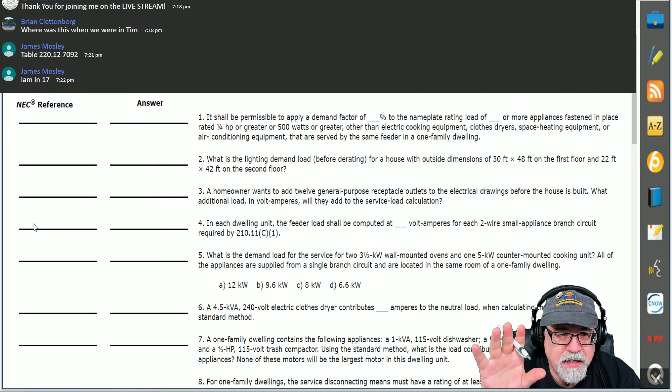I know that there's 26 of you out there, at least right now, who are studying or coming to visit with us to study. Give it a shot. Don't be shy. I know you're sitting in the background and it doesn't matter. Come on out. And again, this is the only way we do this. These guys will tell you I try to do this usually every week. Chime on in. It's okay to be wrong. It doesn't matter. We're learning.

Okay, so it's okay. But this is an interesting one that people get wrong a lot. Because if, and let's wait. Let's see if I get any answers first before we go into this one. And while you're thinking about this, I'll bring another scenario in. If you have your house, let me ask you the same question. Jay's not with us tonight, but Jay's the basement king. Jay does a lot of basements, and he's also a fast track student.

Okay. Katie gave it a shot. Thank you, Katie. Come on, people, chime in. It's okay. Because this is how you learn. And once you learn, you'll never miss it again. Promise you. Okay, so hang in there, Katie. Don't jump off. We're going to finish this lesson on this one. But anyway, while I'm giving time for people to post, there you go, butterfly farting. Do they really? I mean, I can't hear if a butterfly farts, but I guess it's truly possible. So think about this one.

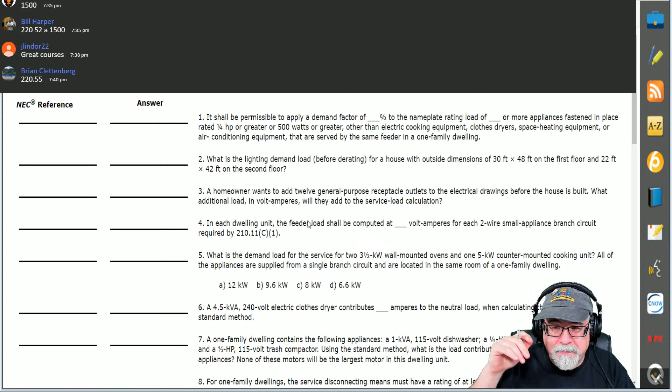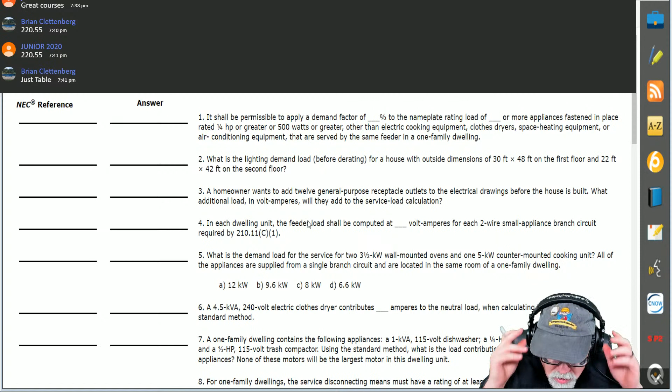But again, there's another way to do this. As you students are going through this, don't look up at the chat part. Just look at the screen and answer the question, and don't look at what other people chat until you have your answer, right? That's probably the best way to do it. Hey, Brian didn't give the answer away though. So nobody's given the answer away yet. Oh, good. So best way to do it is just don't look at the comments until you find the answer and then post your comment in there. Brian Jr., absolutely right. Obviously, y'all are on the right track.

So we got to look at it, see what we're doing. So let me write this down so that I don't lose it, because I ain't getting any brighter over the years.

I'm brighter than last night's debate. I can tell you that right now. No doubt about that.

But anyway, so we got 1 5 kW. Okay. So I've got 2 3.5 kW and I got 1 5 kW. Okay. I've got that answer. All right. Everybody a little time to look, and I'll go on. Got the question? Everybody write down the question. So let's go to the code.

That ain't the code, obviously. Hold on. Got the wrong one up. There we go. That's my timer, folks. Okay, so let's go to 20. Oh, before anybody asks, this is the online edition. NFPA is not doing a PDF version anymore. You have to pay for a subscription version to do anything. Okay.

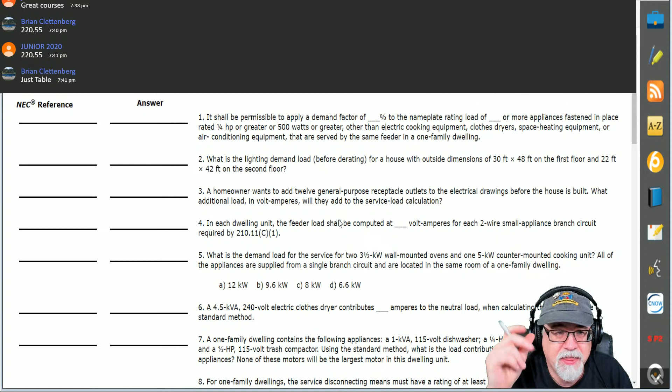And so in this case, it's 6.6 because you simply added 3.5, 3.5, and 5. And then you multiply that by the percentage. In this case, it was 3 of them, so it was 55%. And that's how we got 6.6 kW, and that is the answer. Okay? Everybody kind of square on that one? Very much might be something that you get on an exam. Anybody have any questions about that one before I move on to the next one?

Somebody let me know at least y'all are still there. Here, I'll do my own little thank you, and that'll tell me. There I go. We're still there. Okay, at least I think we're still there. Y'all are just an extremely shy bunch. So there you go. All right. Let me throw that one away, and we'll go to the next one.

I find that a lot of people get kind of stressed out about range calculations, and it really is easy if you slow down and you really pay attention to the notes, and just remember you use C any other time, and you'll use C with note 1 and 2, and you'll use C except when note 3 applies, and then you get to compare C versus whatever column, A or B, okay?

So just kind of keep that in mind.

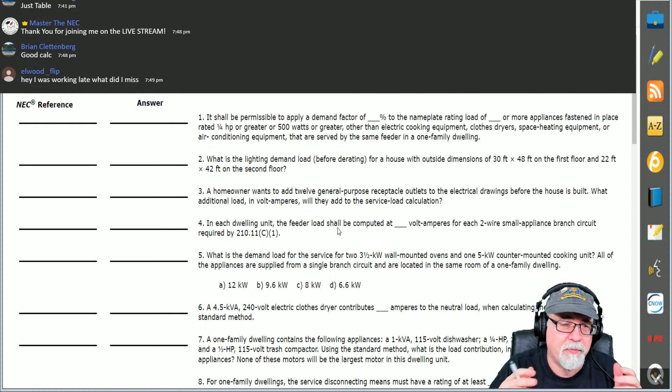All right, so let's move up a little bit. Hold on, let me go down a little bit. I went too far. Okay, let's look at number 6. Question number 6. There you go, Elwood, you can pick up right here with us. So number 6 is not as challenging. Most of the students get this one right, I believe, for the most part. But let's give it a shot.

And again, thinking out loud, chime in. Don't be shy. Feel free to answer. If you get it wrong, it's okay. Ain't nobody going to jump on you. This ain't like some of those other forums online where they're like, what, you didn't know that? No, we don't need to know that. That's why we're working on it, you moron. Don't let other people get under your skin, okay? We're all learning. Everybody had to learn, and we never stop learning. Never stop learning, okay? And I'm also not always politically correct. So again, if I offend anybody, I don't mean to. It's just me.

All right, so the next one, number 6. We've got a 4.5 kVA, 240 volt electric clothes dryer. Incidentally, remember that clothes dryers aren't required, but if they're in your calculation for an exam, you have to take them into consideration. You're not required to have a clothes dryer in your house, but most people put one in. So 4.5 kVA. K stands for 1,000, VA is volt amperes, so 4.5 kVA is the same as 4,500 VA.

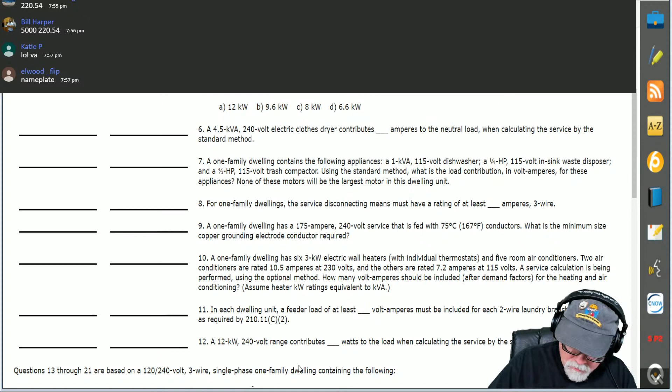So let's get our little patty wax down. Okay. So since it's asking for the amp contribution, the first thing I'm going to do is write 5,000 down, okay? And I'm going to divide that by, do a little Ohm's law here, a little EIR work, okay? I'm going to take that 5,000 and I'm going to divide that by 240. And that's going to give me 20.83. Okay? Let everybody see that on the screen? We only use the nameplate value on the optional method, not on the standard method. So 20.83.

Now, what does it tell me in 220.61(B)? Do we need to go to it? Let's go to it real quick. All right, so we're over here in the code. I can't remember which one my code is. This is the code. So here's neutral and feeder neutral load. So here's A and here's B, permitted reductions.

Note that it says a service or feeder supplying the following load shall be permitted to have an additional demand factor of 70% applied to the amount of 220.61(B)(1) or portion of the amount in 220.61(B)(2) determined by the following calculations. Well, we're not talking about 2. We're talking about this one, 1.

And it says a feeder or service supplying household electric ranges, wall-mounted cooking ovens, counter-mounted cooking units, even induction units. Again, don't let that fool you. Simply a counter-mounted cooking unit. And clothes dryers, where the maximum unbalanced load has been determined in accordance with Table 220.55 for ranges and Table 220.54 for dryers. Okay, but we only have one, right?

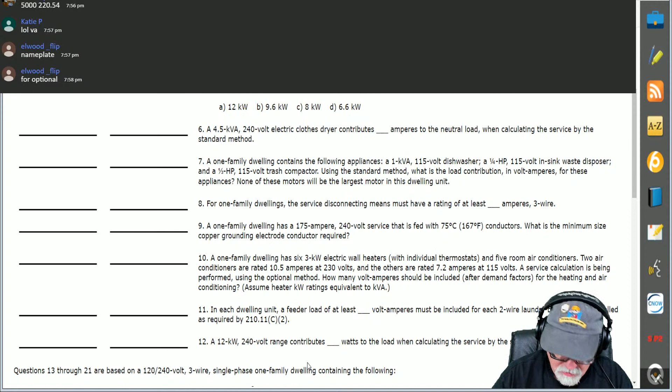Okay, so 20.83, and we're going to do that times 70%, and that is 14.58. So in this case, it wanted to know what the actual contribution is. If I were to round this to 15, for some students, I will accept the 15. I'm like, okay, you know what? In the real scheme of life, not a big deal. But in reality, the most correct answer is 14.58.

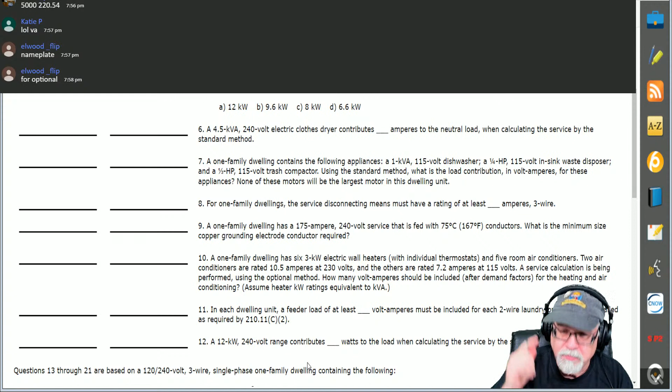Now, on an exam, if they give you 15, 14.58, 16, then the most accurate answer is 14.58 because that is the actual contribution on that neutral, okay? I took the 70% from the actual ampacity. So you take the 5,000, which is what you have to take from 220.54, and I divide it by 240 to get me amps, right? And that is 20.83. Once I have the amps, since the question is asking about amps, then I take the 70%, which is afforded me in 220.61(B), times 70%, and that's where I got the 14.58.

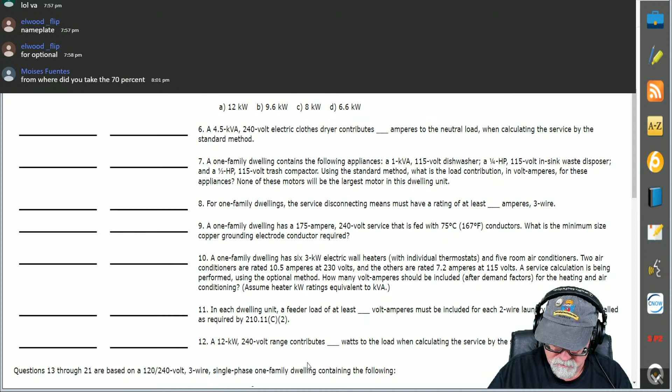Now, let's do it a different way. Let's say I were to take the 5,000, and you want to do it this way. Some people do it this way. Do the 5,000 times 70%. It's 3,500, which is probably what Katie was talking about. But once you get that 3,500, then you have to divide that by 240, and it still gives you the 14.58. So that's the beautiful thing, okay?

Yeah, well, you got to be a little more direct than that, Kevin. You can't put 13 through 15 amps. I mean, really? You daggone right I'm going to mark it wrong because there's an actual answer, 14.58.

So anyway, there's 2 ways to answer that one. That's the beautiful thing about the calculations, okay? You could have done it off the VA, or you could do it off the amps. I have a tendency to like to do things off the amps for questions like that. But again, both ways work. Apply the 70% either to the VA or to the amps. Isn't that a beautiful thing? It works either way. All right, next question.

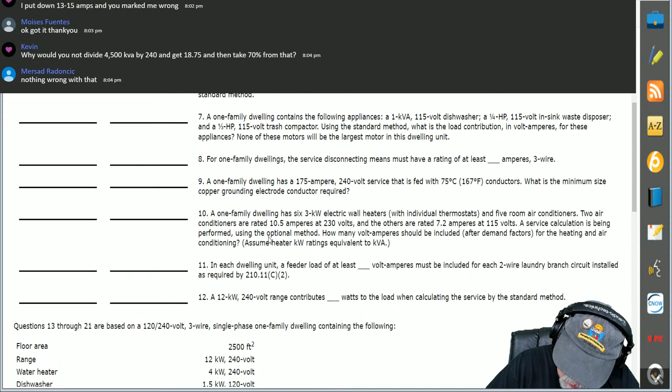A 1 kVA 115 volt dishwasher. So 1 kVA 115 volt dishwasher. I like writing stuff down. Just me. Okay. Number 2 is a 1/4 horsepower. So I'm going to write this down. 1/4 horsepower, 115 volts. Remember, always use what they give you in a question.

All right. Kevin, no, because 4500 VA, we're using a standard method. Standard method 220.54 says you got to use 5,000 or the nameplate, whichever is greater. We wouldn't use that. 4500 would be optional method, where that question wanted you to use the standard method. Got to be very careful. Make sure you understand the difference.

Okay. All right. So what do we have? 1/4 horsepower, 115 volt in-sink waste disposal. So let's just say it's a disposal. Next we have, what is that? 1/3 horsepower. God, it's hard to see. 1/3 horsepower, 115 volt. What do we got? Trash compactor. They even make those anymore?

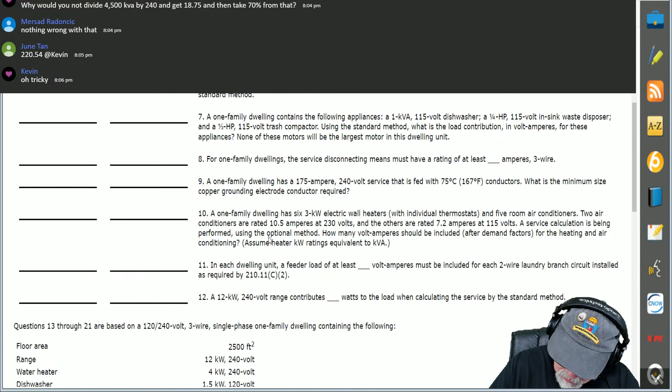My mom had one when I was younger, and it stopped working. So we just used to put trash in it anyway, but it never would compact it. I was the trash compactor in our family. Hey, Paul, shove that trash down. That's what I do. All right, so there you go.

Now, okay, so that's it. It says using the standard method, what is the load contribution in VA for these appliances? None of these motors will be the largest motor in the dwelling. So again, that's just slang for saying, no, you don't need to add the additional 25% for the largest motor.

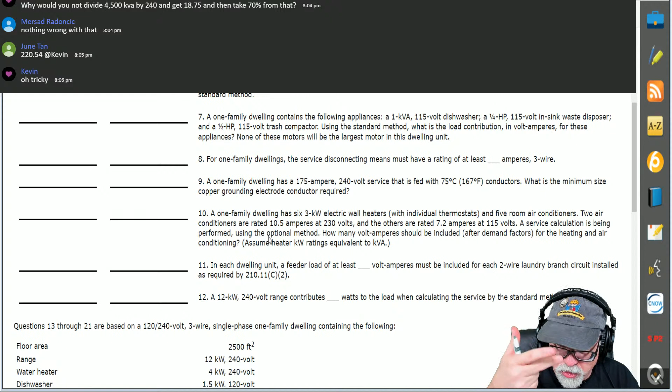So how many do we have, folks? We have a dishwasher, we have a disposal, and we have a trash compactor. I only count 3. Is that what y'all count? 3. It's important to remember that. It's only 3. Okay. This is great. This is a great one.

So the first thing you always want to do in an exam, when you get a question like this, this actually counts as a math question on many exams, okay? Because it's part of some math you have to do. Anytime you have some type of step in math, they have a 1-step, 2-step, 3-step, or 4-step. Like in Texas, if you have to calculate 2 things, it's a 2-step question or a 3-step question, okay? And they consider those master level. And I kind of think that they're pretty elementary, but again, they make you think. And anytime you're in a stressful environment, even a 2-step can be tricky sometimes, right?

So, all right, what do you think the first thing you have to do is? The very first thing is I need to get the values of each one of these motors, right? I need to solve these motors, okay? So first of all, I got to get the FLC. It's basically short for saying I'm going to have to go to 430, in this case 430.248, I believe, in order to get the values for single-phase motors, because all these obviously are single-phase. So let's make sure I wrote what I need down. So let's go to the NEC.

And it's the first thing you guys should do in this question on an exam, okay, is go to the NEC, and you got tabs in your code book for these tables. So you should go boom, boom, boom right there. I had somebody tell me the other day, you don't need tabs if you know the code. Come on, man. You're taking an exam. Anything that's going to shave some time off of looking up things is always a benefit.

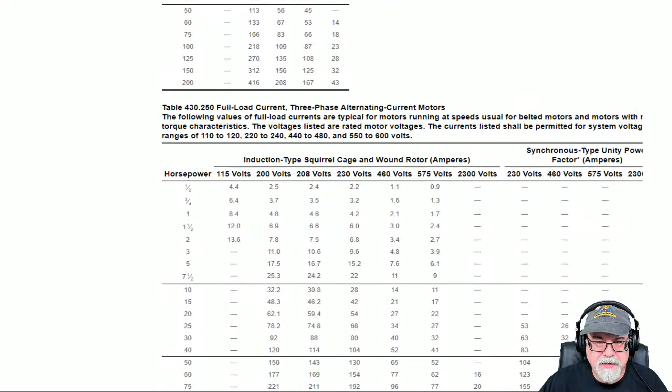Whoa, what happened to my... Hold on for a second. Whoa, what is going on with my screen, folks? All right, hold on. All right. So I don't know what was going on. It had a mind of its own.

All right. So we're looking at 430.248 single phase. We're right here. Okay. FLC. Remember, the value that's on the motor is the nameplate value. We don't want that when we're sizing conductors and overcurrent devices, only for overloads. For everything else, we use an FLC for the most part. So first one was 1/4 horsepower right here, and it was 115 volts. So it's 5.8 amps. Write that down.

The next one is a third right here. And that is 7.2. Write that down. 7.2. First thing you do. So now I have my amps. Okay. So once I have my amps, now you're thinking, well, wait a minute. And you'll come back to me now because we're pretty much done back there.

So now I already got one at 1000 VA for the dishwasher. I gotta convert the other ones now to what? VA. How do you do that? It's pretty simple. All you're going to do is take the amps and you'll multiply it by the voltage. So let's do the first one. So it was 115 times 5.8, and that is 667. So that is the disposal.

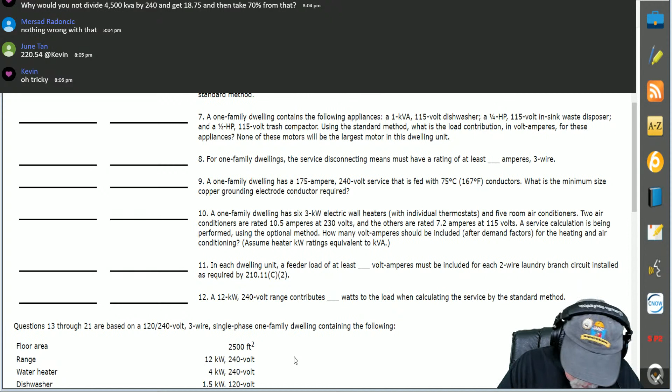And then the other one was 115 times 7.2, and that is 828. And that is the trash compactor. Of course, we had the 1000 for the dishwasher, right? So you might as well write that one down, 1000 for the dishwasher. Okay? Now, let's add those up. 1000 plus 828 plus 667 equals 2,495. So the question is simply asking for the standard method load calculation in VA for these appliances.

All right. Now, if you had 4 or more, then you could have applied a demand factor of 75%. But we only had 3. So don't get tricked up and apply a demand factor of 75% because you didn't have 4 or more. Now, on our nifty little fill-out sheet in the Fast Tracks program, it says right here, if 4 or more, multiply by 75%. If fewer than 4, the total VA on line 10, so basically you just add them up and that's it. So 2,495 VA is the answer to question number 7.

Of course, for the code references, we only make you put 1 in the Fast Tracks, so it would be the application of the appliances. But you could also have put in there 430.248. We'd allow that as well. But most of the time it's going to be 220.53 for that one, okay? You just don't add the 75% because you didn't have 4 or more.

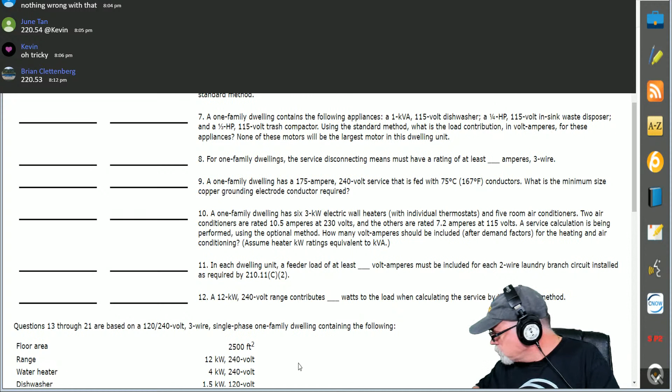All right. So somebody look that one up in the code for me. You should remember that there is a minimum ampere rating for a one family dwelling. This is one of those ones on an exam where you're like, I should get this right. First of all, dissecting the question, it's a service disconnecting means, so you know this is in services. So let's see who will answer this. And Fast Track students, feel free to chime in. This is a value that you really should remember, because it is the minimum size that you would have for a single family dwelling. Of course, you could have individual dwelling units that this wouldn't apply to, like in apartment buildings.

Okay. Tree, there you go. Very good. Kevin, very good. Absolutely. So 230.79(C) says that for a one family dwelling, it's going to be at least 100 amps. Interestingly enough, it could be less than that for an apartment, could be 60 amps. I believe that is 230.79(D) for that. All right. Very good. That one's a little too easy. So let's go to the next one. Now, here's something that you might see on an exam.

Okay, so buckle up, get your code books, get your pens, get everything ready. Number 9: a one family dwelling has a 175 ampere, 240 volt service that is fed with 75 degrees C conductors. And that is obviously important information there. What is the minimum size copper grounding electrode conductor required?

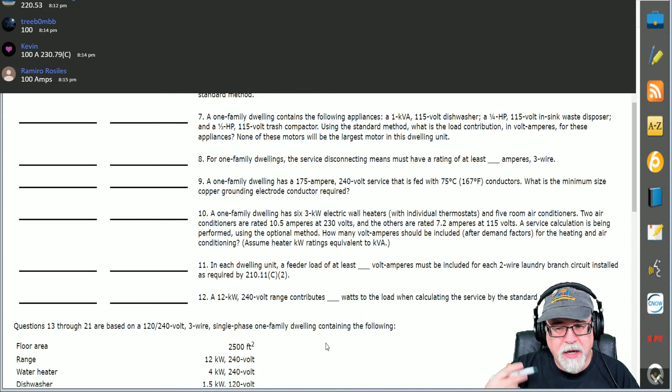I'm going to look at it and say, well, I know something very unique about this because it's a one family dwelling. The service size is between 100 and 400 amps. It's a 240 volt service. So we know it's what? 2 hots and a neutral. Okay, something's adding up in my mind. Hopefully it's adding up in your mind. That 75 degrees C conductors helps me once I get to that point. What can I do? What do I need to do? Okay, so think about it for a second. Give it a little thought. And let me see what you get.

And while y'all are doing that, the brains are working. I can feel them working. I'll go over to the code section. And again, I'm in a 2020 edition. Brian's giving everybody a hint. So don't y'all go cheating and looking at Brian, but Brian is giving y'all all a hint, kind of how to think that.

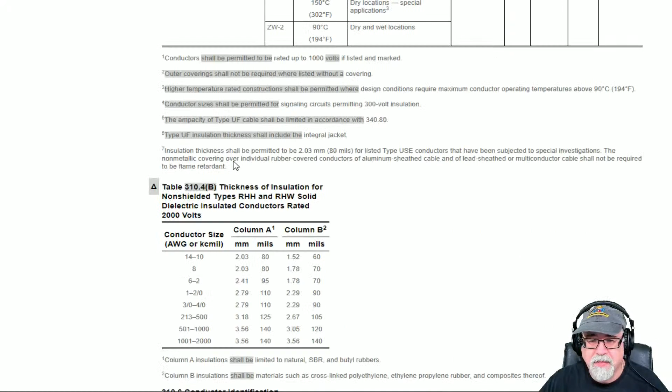I'll go on and go to the code, kind of help y'all out, because this is one that I would expect to see on some exams maybe, and you just need to know how to do this. Okay, so let's go to the NEC. All right, and I'll go back to the top for those that are watching. Oops, sorry about that, clicked the wrong button. Okay, so it is a little different in the 2020 than it is in the 2017, but same principles. Okay, this kind of chimes with what Brian was saying. Now, in this question, I didn't give you anything about adjustments or anything about corrections. Nothing.

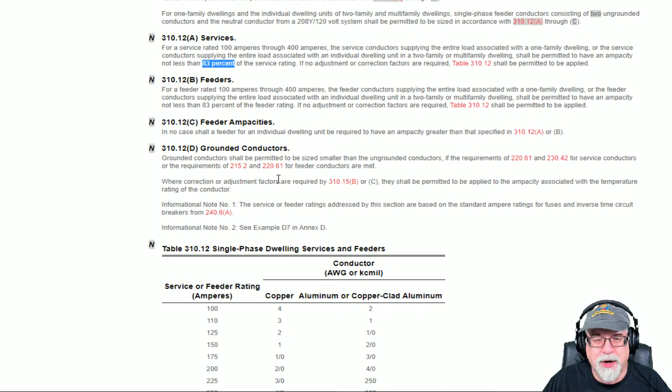Now, here's the difference. In the 2017 code, I'm going to make you calculate it. In the 2020 code, we're going back to the cheating world. We're going to give you the little table. My goal is to make sure you know how to calculate it. So, how do you calculate? You can go to the table, but in the real world, you take the rating of the breaker, in this case a 175, and I do 175 times 83%. So in our world, what I'm doing is making sure that I'm going to have conductors that are at least 83% of the rating.

So 175 times 83% is 145.25. Okay. Of course, you could cheat. You know what? I'm not going to call it cheating. It isn't cheating. It's right here. But I wanted to show you how to do it. 175 requires a 1/0. Okay? In this scenario, it has to be the size of the ungrounded conductors. That's the hot. And then you take that and then you go to 250.66, right? But I want to show you how to do this if you didn't use this table.

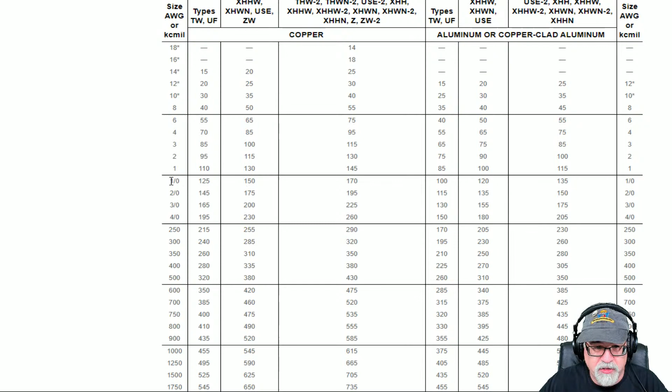So we got 145.25. Remember, it was 75 degrees C conductors. Then you would go to 310.16 right here. And 75 degree, remember it told you that? And you go down, and I need a conductor that's good for 145.25 because it's got to be at least 83%. And 1 gauge is not good enough. It's only good for 130. So I'd go to 1/0, which is good for 150, which is more than 145.25, so that is your answer. So once it's 1/0, then you go to table 250.66.

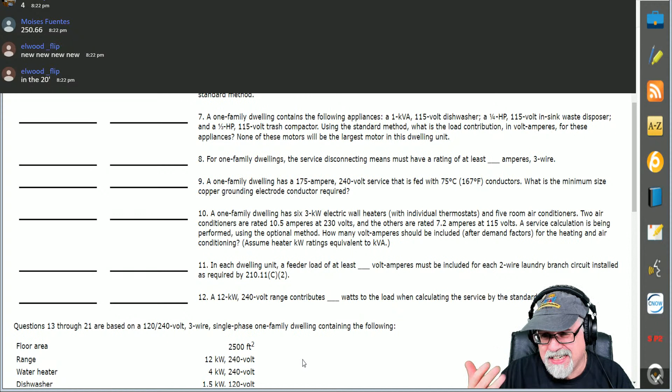Hopefully y'all are following along with me, and I'm moving quickly, but I think y'all get the gist of it. So here's 250.66. Once we know 1/0, then the size of the GEC is going to be a 6 gauge. And so the answer is going to be a 6 AWG. Okay? But a really good question for me to show you how to use 310.12 or 310.15(B)(7) if you're in the 2017 code. So 310.15(B)(7) in the 2017 code, it's not new, just been moved. But in the 2020, it's 310.12.

And the difference is the table came back in the 2020. Now, in the 2017, it's still in the book. It's just you got to go back to Informative Annex D. Got to go to D. Now, one little caveat, folks. Let me tell you this while I'm teaching people. That table is great if there's no adjustment and corrections involved. The table's wonderful. But the moment you throw an adjustment or correction into the mix, that table's no good anymore. So then just forget the table.

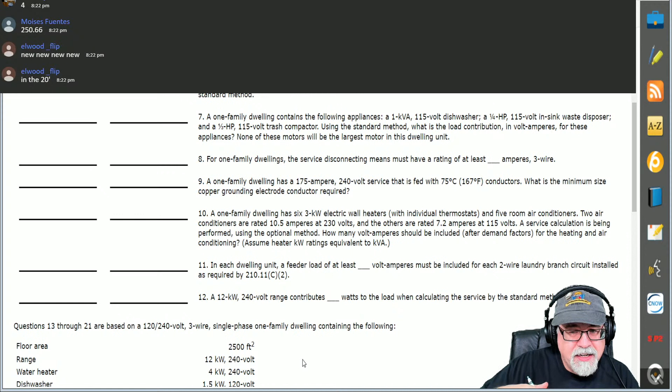So the conductor still at this point would be 83%, but then you would treat it like you did anything else. You would apply adjustment and corrections to it so that at the end of the calculation, I still have a conductor that's good for 83%. So that means you would go up in size in order to apply the adjustment and corrections so that you at least have a conductor that's 83. You can't get rid of the 83%. It's got to be at least 83%. But if you've got ambient temperature, or if you got a number of current-carrying conductors that exceed 3, then that table's no good to you. You still use the 83%, but you're going to use 310.16, the ampacities, and you're going to treat it just like we do in derating demystified.

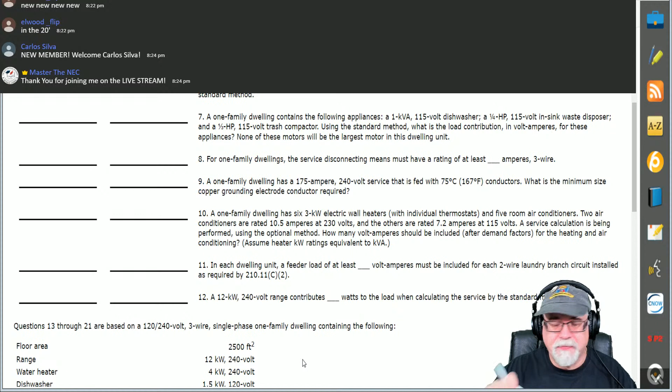All right, so that's how you do it. That's a powerful lesson. Hopefully you got it. If you didn't, go back and watch this later, and watch it again and again and you'll get it. All right, let's move on to another question.

Number 10. So number 10 is one family dwelling. Let me get my pen out here so we can work this one out. All right, so I have a one family dwelling, has 6 3 kW electric wall heaters, each with their individual thermostat. So it's typical strip heating like we normally would have. So I've got 6 of those, 6 3 kW wall heaters. They each got their own thermostat. Okay, cool. I've got 5 room air conditioners. I got 5 overall. So what is that made up of?

Well, it says I got 2 air conditioners rated 10.5 amps. So I've got 2 of them at 10.5 amps at 230. Easy enough. And the others, which tells me that I've got 3 at 7.2 amps. They're not giving you the numbers like that because they want to throw you here. And those are at 115 volts. It says a service calculation is being performed using the optional method. How many VA should be included after demand factors for the heaters and the air conditioning? Assume heaters kW rating is equivalent to kVA.

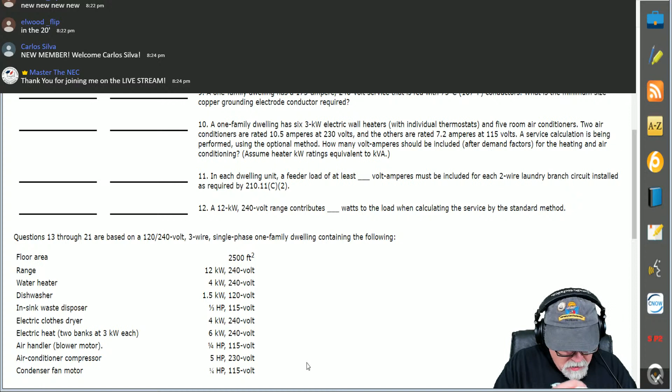All right, so we've got that. Hopefully you're working it out with me, folks. Work this one out with me; it's the only way you're going to learn. Remember, we're doing the optional method. They're all separately controlled. That's important. So let's see what it says in our calculations.

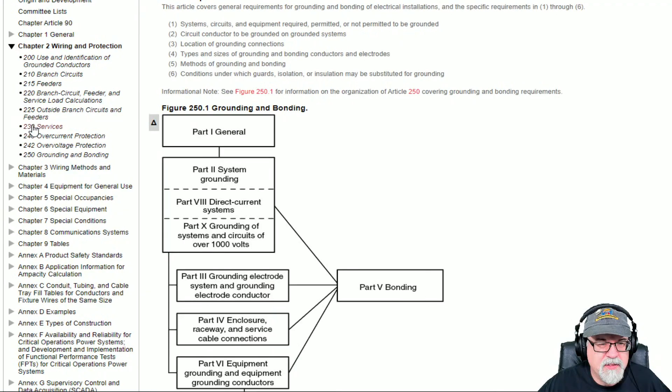Let's go to the code book. Hopefully y'all jotted those down. I'm at the code book, making sure I got it. Yep, there we go. Just follow along with me, folks. Let's go to 220. Oops, went too far. These things always throw me. Okay.

First thing, let's talk about that heat real quick, because I've got to compare. We know we've got to take the AC at 100%. We can leave that for a second. We'll do the heat because that's the harder one. 40% of the nameplate ratings of electric space heating if 4 or more separately controlled units. Well, there were 6 of these things, so I can apply 40%. That's a beautiful thing.

So 6 times 3,000 is 18,000. 18,000 times 40% is 7,200. And that's 7,200 VA, because remember, watts is synonymous with VA. So stick that 7,200 aside for a second. Now we've got to work on this AC. We did the heat; they were strips, those were easy. Let's do the other one.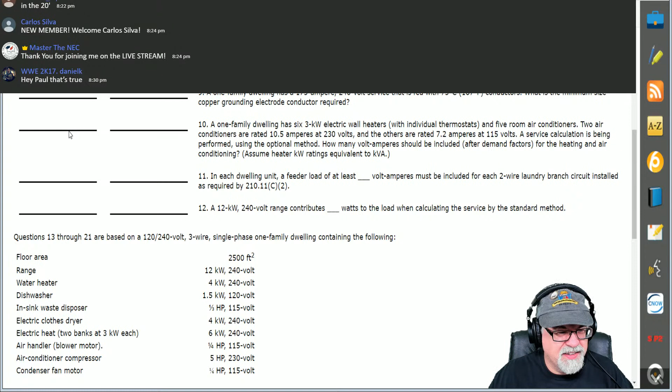Not sure what it says. Maybe I've lost all viewers. Let's see here. No, I think I'm still there. Not sure. There you go, Kevin.

1500 VA. Absolutely. Absolutely. There you go. There you go.

Question. You got a question, Brian? Shoot. I'm not sure if you had a question or not, Brian. You did a little question mark there. If you got a question, shoot it. Let's have it. Maybe not. Maybe no question.

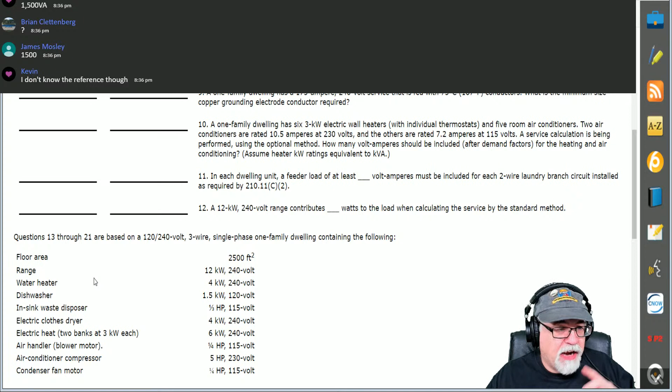Okay. All right. Let's look at number 12. Oh, the reference, near the same place that it was previously. Obviously, we're dealing with a 220 calculation to give us a VA value. So you're going to look at 220.52(B) is where you get the 1500 VA. Okay. And it's right next to where you get the one. Sorry, Brian. It's right there over where you got the answer for the 2 small appliances as well.

So just remember, 220 is going to give us the VA values. 210 is going to tell us the circuits and the laundry circuit and what you need. That's the 210 for the branch circuit. When it comes to the load or wants a VA value or something like that, always remember it's going to be in 220. All right. Let's do 12.

Good class tonight. 12 says, okay, a 12 kW, 240 volt range contributes blank watts to the load when calculating the service by the standard method. Okay, let's get some answers for this one.

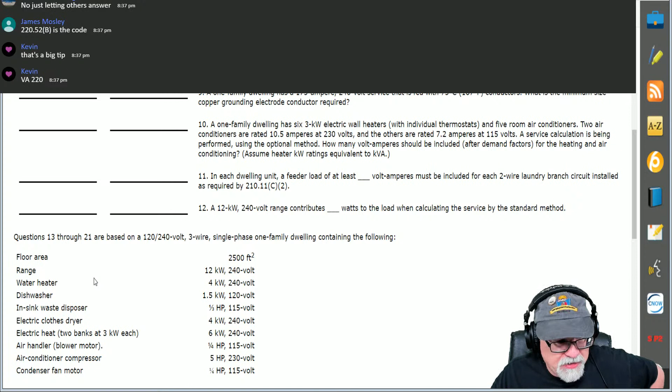Number 12. So I've got a 12 kW range in my house, but I'm doing a load calc, standard method. What is the contribution in wattage? What's the value that I would contribute to my load calculation under the standard method for that 12 kW range? What do you think? Somebody throw me out a number. Let me hear you. Kevin, I like your answer. Don't like your reference.

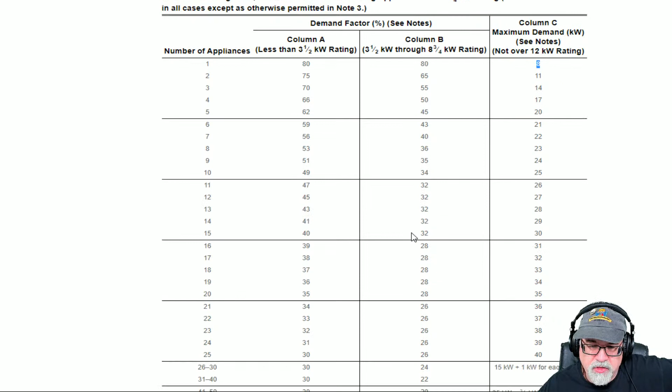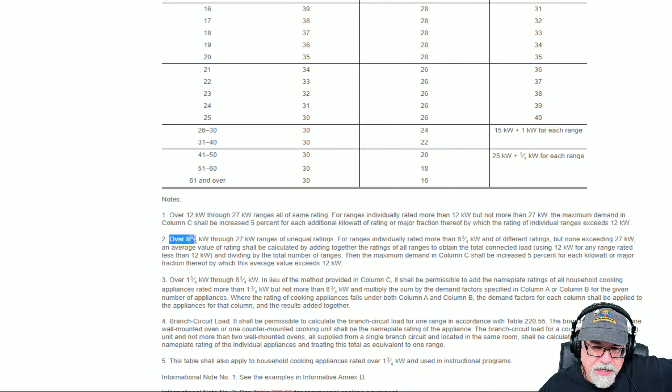Now, see, it says notes. Now, if it was over 12, then you got to use these notes. Or if there was multiple ones with unequal ratings that are over 8 3/4 through 27, then you use note 2. But in this case, it's just one range. One range. It's not over 12. So I can use 8. So I have some built-in demand allowances here.

It's a beautiful thing, as Martha Stewart will say. All right.

So just remember that. 8,000 watts, one range. You might say, but it's 12 kW, Paul, it's 12,000 watts. How can it be 8,000? Because it is, due to demands and allowances. Cycling. It's all good. Now, if you're using the optional method, you need to use the nameplate. That's where people get confused.

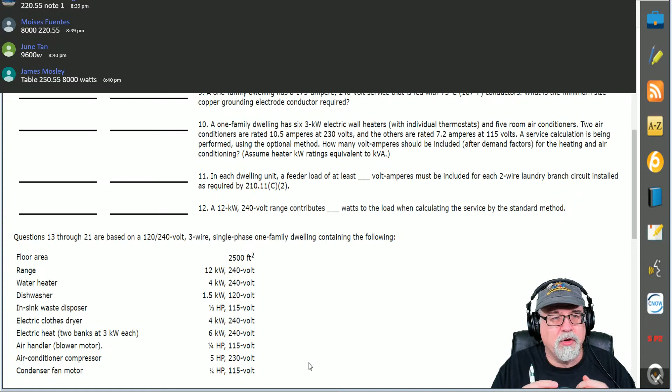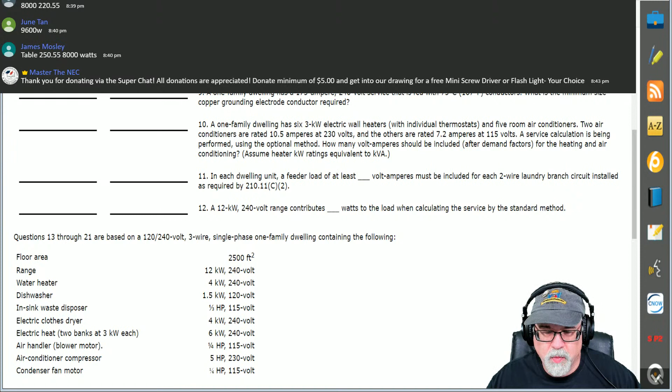All right. We've got a little time to do one of the more complicated ones here. Let's do the standard method. Let's try to solve these 4 questions right here. All right, so here's our givens, folks. And we're reminded that kW is equivalent to kVA. So you don't have to reinvent the wheel. Notice that we're going to answer questions 13, 14, 15, and 16 before we end tonight's segment.

So the first thing I would do, folks, is your scratch paper. You're not usually going to have it like this on an exam that makes you do all these things and gives you a whole building, but they might. So just be ready to do it. Now, we've already looked up most of these values. We'll look it up again, but you still should have the value.

The very first thing that I like to do if I got this question is convert all of my horsepowers into VA right out the gate, because I need to work in VA. Remember, kW is equivalent to kVA, but I need to break it down into the lowest form. So the first thing that I'm going to do, and I need to scroll down a little bit, is take all of these loads that are motors and get a VA. And you remember how we did that earlier?

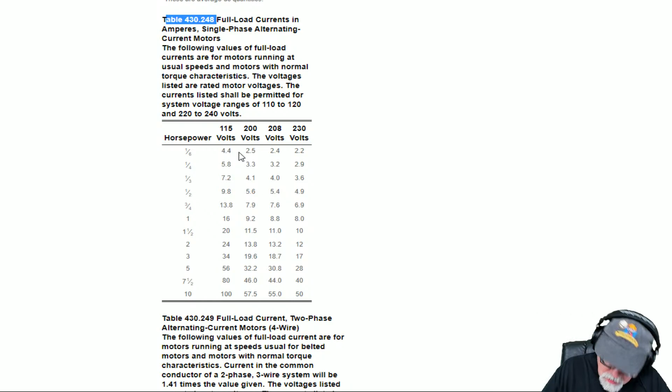So again, this is what I like to do first. If you don't, that's up to you. But first things first, I need to get my values. So here's my table. You more than likely have a tab for that. So 1/3 horsepower, 7.2 amps. Got that earlier. 1/4 horsepower, 5.8. And 1/6 horsepower is 4.4. We didn't have that one earlier. So 4.4 amps. All right, so we're done with that. Let's get back to our job here.

All right, now, remember how we convert these to VA? So the first one would be the 1/3 horsepower. We're going to do 7.2 times 115. Yes, you're going to use the value that's in your question. So the 1/3 horsepower equals 828 VA. Then the next one was the 1/4 horsepower at 5.8 amps. So 5.8 times 115, and that is 667 VA. And then we'll do the 1/6 horsepower. That one is 4.4 times 115, and that is 506.

All right, so by doing that, it gets me the values in VA so anywhere I need to add them, I can do that. Now, it might not be what's in the question, but to get there, I need to get those VAs. So do that first and make sure you get all of that out of the way, okay? All right, so let's work the first thing here.

All right, so how many square feet do we have in this house? 2,500 square feet. That's it. Boy, if you get this question, you got to love it, because it's easy, right? 2,500. Oh, and that's where this form comes in beautiful, guys. If you got one of these, I'll fill it out and show you. I wish I could do it on the screen. Maybe I'll work on that in the future.

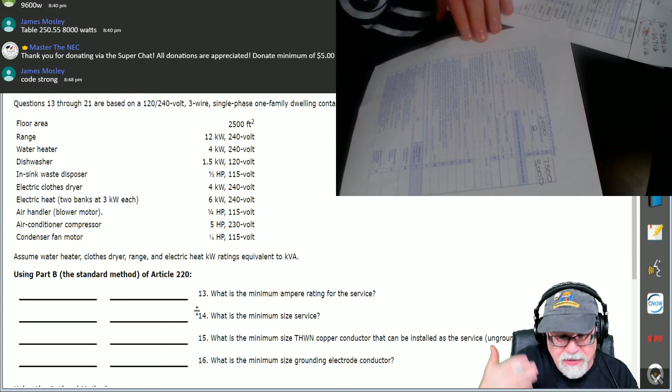All right. So as you can see, 3,000. Here, look at this. Oops. There we go. Okay. So the next one is, it says, well, we have a laundry circuit. Obviously, we see a clothes dryer, doesn't mean it's laundry, but we know that generally we're required a certain number of branch circuits in a house. So we got the laundry. So here, how many do we have? We got to have at least 1. So we'll put 1 right here. So that would be 1,500 times 1. So the answer is 1,500.

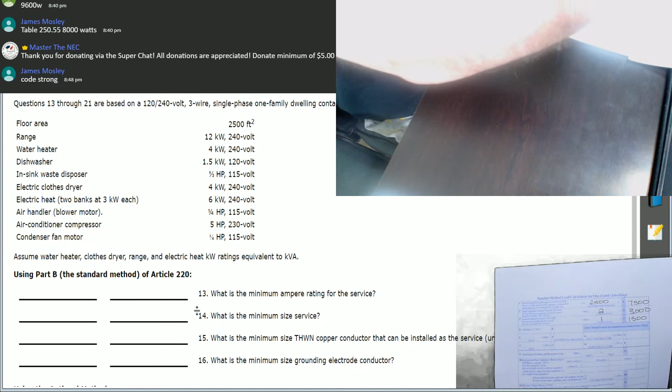All right. So we got the 1,500 right there. Y'all saw it on the screen. Hold on here. Okay. Oops. Knocking all of my papers around here, folks. All right. So what's next?

So the next thing that we're going to do logically is, okay, now since we have all of the general lighting and small appliance, I get to think about demand factors. It's the standard method, right? So remember in 220.42, it says that I can take the first 3,000 at 100%, and I take the next 117,000 at what? Anybody know? I know you know. Come on. Let's go to the code. Y'all are awful quiet out there.

So here's the code. I'm going to go through it so y'all can follow along. We're going to do this together. We're ending on a high note tonight, guys. For all of you that are preparing for an exam, we want to end on a high note. So here it is on the screen, 220.42. Here's what we're talking about.

First 3,000, 100%. 3,001 to 120,000, which typically you'll hear us say the next 117,000, because 117,000 plus 3,000 is 120,000. So it just kind of makes it easier. But we are telling you 3,001 to 120,000, it's 35%. And anything over 120,000 is 25%. Okay? So in our scenario, let's come back to me.

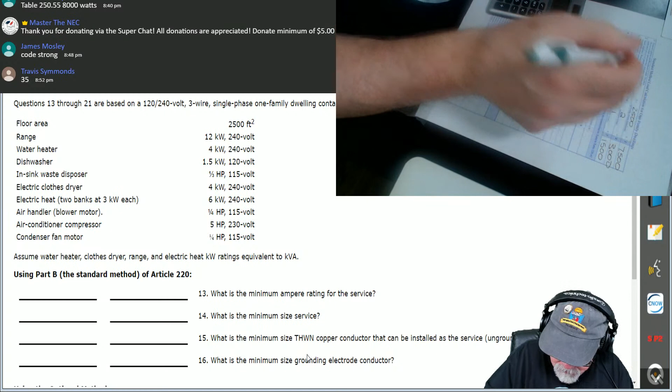So in our scenario, we get to take these, and we're going to add line 1, line 2, and line 3. So let's get our calculator out. So that's 7,500 plus 3,000 plus 1,500. 12,000. So what do we put right here on our little sheet? 12,000. Okay. Now, you carry it down right here, 12,000. Then you take the 3,000 away because we're going to use that later. So 12 minus 3 is 9. So the 9 goes here.

Okay, now you'll see how I'm using the sheet. The 9 goes here. So then we have no other additional there. So now the 9,000. So remember what we said? First 3,000 at 100%. The next value, we get to apply. So if you go back, let's just take you back so you can see in the code. If you look at how you run it, the next one, oops, sorry about that, the next one is 35%. Very rarely will you ever make it to this 25%.

Okay, so the amount that's over 3,000 all the way up to 120,000, that's the 9,000. So you take the 9,000 and put it right here, and then do that times the 35%. So 9,000 times 35% is 3,150. So 3,150 goes right here. Now you're going to come down here and you're going to take this 3,000 plus line 7. There was none from line 7.

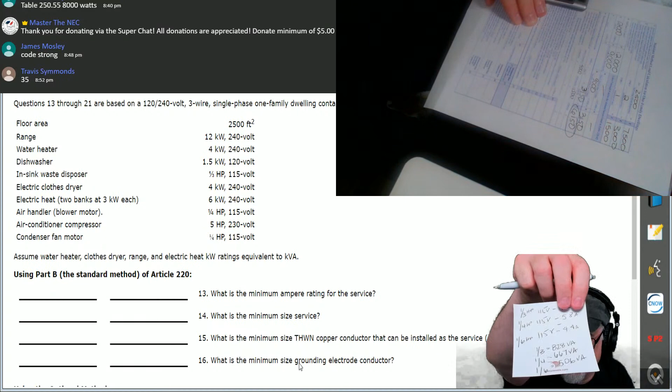The next, it says we have a dishwasher, and that is 1.5 kW. So that is synonymous with VA, right? So that's 1,500. Write that down. Remember, try to break it into VA. The next was a disposal, in-sink disposal, and that is 1/3 horsepower. So we did 1/3 already, and we looked that up, remember? And these are the values that we had right here. See that? I can put that under there for you, right there. See the third, 828. So we're going to write that down. So disposal, 828.

And there is no other appliance at that point. That's it. Okay. All right. So what do we want to do? Well, since we only have 3, notice right here on your fast track program, it talks about this 75%. We don't get to use that in 220.53 because we only had 3. So what are we going to do? Just like you thought. We're going to do the 4,000 plus the 1,500 plus the 828. And that is 6,328. And guess what? We got to take it all. So we're going to write that down right here, 6,328. Okay, so that's another number that we'll need to add at the end. So I like to circle it.

All right, the next thing we do is the clothes dryer. So what's the clothes dryer here? Clothes dryer is 4 kW. Well, what did we say earlier? In the standard method, in 220.54, it's got to be 5,000 or the nameplate, whichever is larger. We're not doing the optional, we're doing standard because the question asks for standard, right? So we're going to take 5,000. We're going to put 5,000 down. Write that down. Next one.

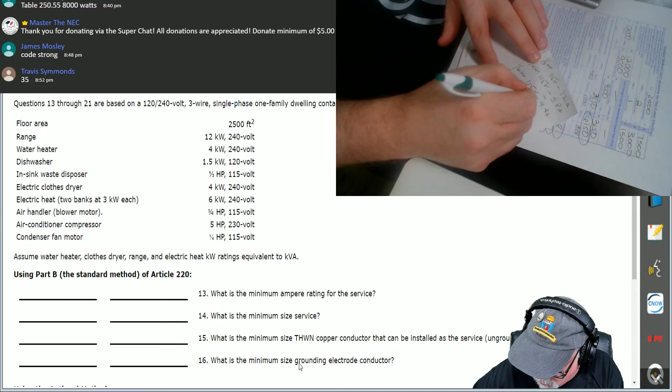And we have the air conditioner compressor, and that is at 5 horsepower. Oh, we didn't look that one up, did we? So we got to go back because that is going to be utilized, and that is single phase, but it is 5 horsepower. It's an air conditioning compressor, but it's treated as a motor. So real quickly, we got to go get that VA, and we'll write that down on our sheet. Let's get our little sheet, and we got a 5 horsepower at 230 volt, and let's just go back to the code.

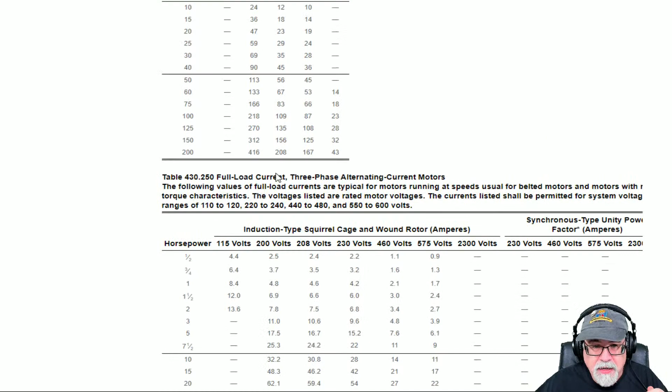Now, there's a reason why, folks, they're not going to give you a whole bunch of these on an exam, because they know these things take time to do, but they will give you any possible piece of this. That's why we use this form in the Fast Tracks program, because typically an exam's not going to ask you to do a whole calculation like this. But if we train you to do it, then you get familiar with it so that if you get asked any little piece of this, then you nail it, okay?

So remember, this was a 5 horsepower, so here it is, and it was 230, so it's 28 amps. So you're going to write that down. So that's 28 amps. So now let's go back to where we were.

Okay, we're all the way back. So that's 28 amps. So we got our little list of all of our horsepowers and everything like there, okay? All right, so let's do some math here. So let's look at the heat. So we know the heat is 6 kW. That's a given. Now, a lot of people might look at this and say, so 6 kW is 6,000 VA.

And they might look at this and go, well, I can already tell you that I got to get the VA for that 5 horsepower. So I'm going to go 28 times 230, and that is 6,440. So I already know that the AC is going to beat out the heat, right? I already know this, but let's finish it out. So we have 6,440 for the air compressor. The compressor unit.

So let's do 6,440. So what was that 1/6 horsepower again? You remember what the VA was? 506, right? So 506 VA for that. And then we want to add the air handler motor. That was a 1/4 horsepower. How much was that? That's 667. Added that in there. And anything else? Nope. Air handler, air conditioning compressor, and condenser fan motor.

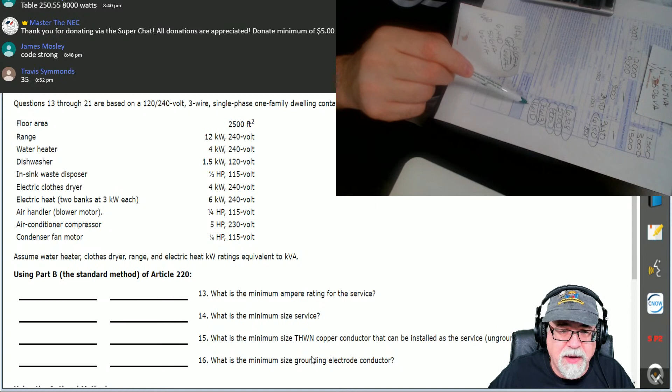Okay. So we're working each one of them. Now remember, we're taking 25% of the largest motor. And in this case, the air conditioning compressor is the largest motor. It's actually the largest motor in the equation, right? I don't think there's any of them any bigger than that. Now, that is the largest motor.

All right, so we got all these values. Now, what are we going to do? We got to add them all up. So let's go on and add them all up. So 6,328. Well, then we got all the ones that we circled, we got to add up. So 6,150 plus 5,000 plus 8,000 plus 7,613 plus 1,610.

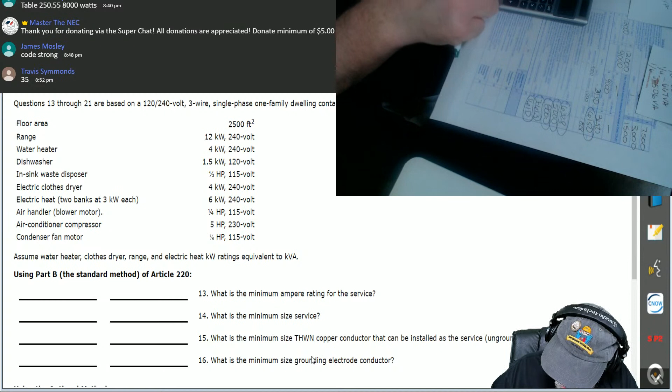Okay. We got all the values here. Did I miss something? I feel like I missed something. No, I don't think I missed anything. Let me do it again. 6,150. Hopefully y'all are doing it with me. Check my math here. Okay. 6,150 plus 6,328, so that's that one, plus 5,000 plus 8,000 plus 7,613 plus 1,610.

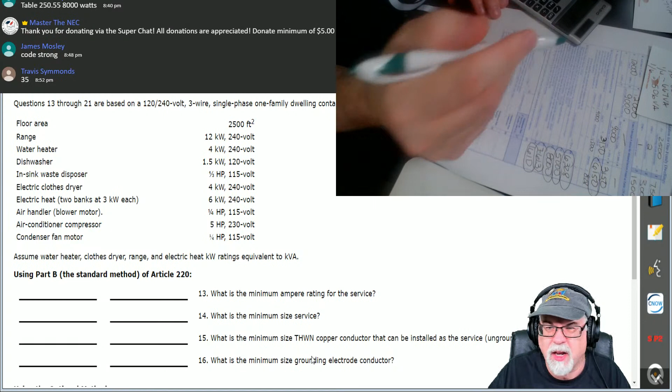Okay, so what we should have, if y'all are following along, those that have the fast track should follow along right here, which is number 16. We want to put the total of all these, which is 34,701. Okay. Now, the voltage, obviously, this is a 120/240, so we'll do 240 volt. So now it's simple, how y'all are used to doing everything. You do 34,701 divided by 240 equals 144.5.

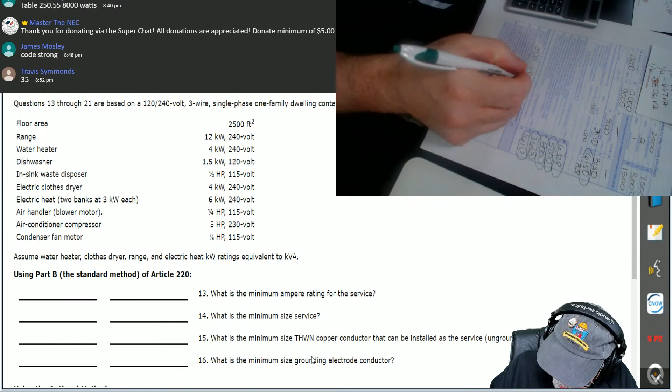And since it's 0.5, if you remember at the beginning of 220, it tells me that anything 0.5 or greater, I can round. So in this case, I want to put 145. So there you go. There's the 145. All right. So when you see the 145, the next thing you logically think, well, what size overcurrent device do I put on it for the 145? I'm not sizing conductor yet. I'm simply sizing the overcurrent device.

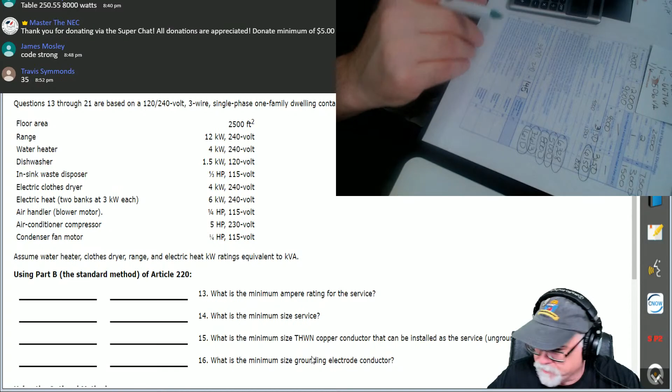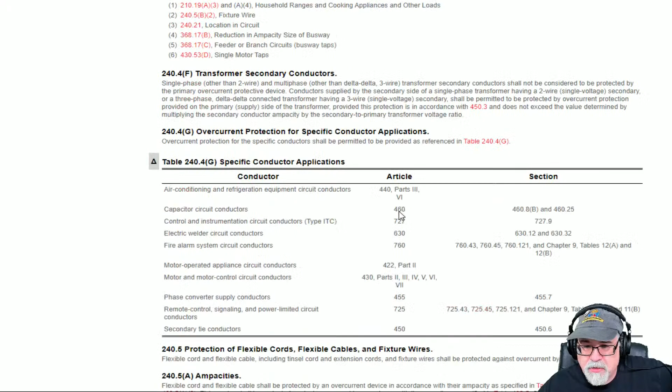Well, 145 doesn't correspond to a breaker in 240.6, and I don't think it does. So let's go look. I'm glad we did this one this way, slow. So let's go look at 240.6. If a breaker is 145, then we can use it, but I don't think there is. So here we're at 240.6, and here we go, folks. Let's see, we got a 125. Oh, got a 150. Okay, so the minimum size service or feeder based on 240.6(A) is going to be what? 150. Okay.

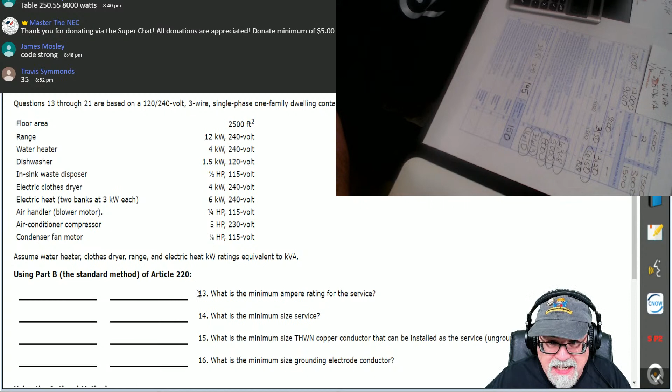All right, now, best possible answer, folks. Remember now, what size conductor? So we answered the question. So question 13, what's the answer? What's the minimum size rating of the service? The minimum size. What's the minimum size rating?

Oops, hold on. It's going to time me out again. I hate when it does that.

So question number 13 should be, what is the minimum ampere rating? Well, the minimum ampere rating is 145, not the device we selected. That's the size service. The minimum ampere rating is 145. So that's question 13, and we'll just do that over here. This is question number 13. All right, so number 14 says, what's the minimum size service? Well, remember the service is, I'll do that in a minute, June. The service is what the rating actually is of the breaker, okay?

Hold on, we're not there, Mosley. You're getting a step ahead of me. We're sizing the service now. Remember, the 83% rule is for the conductors. We have to get the service rating first before we can even use the 83, but I like what you're thinking. I like how the brain is working. All right, so the service is 150, okay? The minimum ampere rating is 145. Because it didn't correspond, that's how we ended up with the 150.

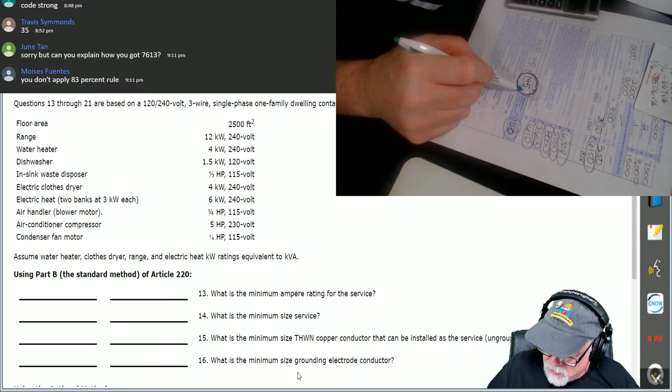So we're using the 150 to do exactly what Moises is saying. Can I size it to 150? Absolutely. But can I use the rule in 310.12, or if you're in the 2017 code, 310.15(B)(7)? The answer is sure. Why not? So in this case, since the service rating is 150, let's do it. So 150 times 83% is 124.5. No conditions of use have been spoken about yet. It's service, so usually there aren't anyway. So I need a conductor that's good for at least 124.5 amperes.

So let's go to the NEC. We're using the rule, assuming it applies, and it does in this case. I like how you're thinking, Moises. Let's go to 310.16 and find a conductor. And again, since we're not doing any adjustment or corrections, we're going to go straight to what we're dealing with. 124 amps is what we're looking for. Remember the rules in 110.14(C)(1). When it's over 100 amps, you're going to be under 75, so that should be a given by now. Even if it didn't give it to you in the question, you should understand 110.14(C) rules. So here, we're going to go down and find a conductor that's good for 124.5.

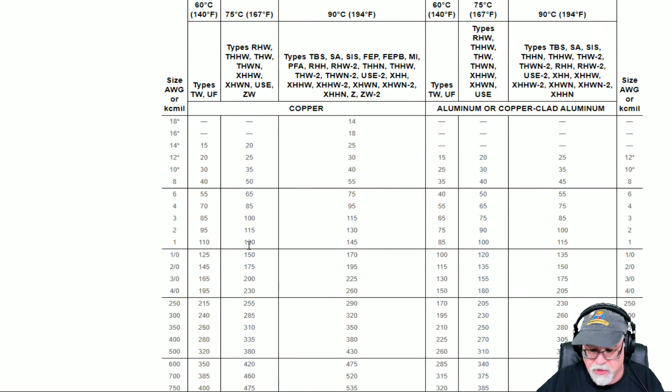And right here, it looks like it'd be a 1 gauge. So let's go back now to the browser. So the answer to, oh, and it did give us a size. There you go. It says consider the minimum size THWN. So that tells us it's under 75 as well.

So even if we didn't know the rules in 110.14(C), it doesn't really matter because THWN only has one H, so that's 75 degree rated column. Again, we only use 90 for adjustment and corrections anyway, so it really wouldn't matter. There's no adjustment and corrections that have been given in this equation. So we know that we'd be under the 75 degree column as well because it is THWN, and that's what's under the 75 degree column.

Now, if it had a -2, it could be 90 or 75, but it would be 90 wet or dry. But in our question, it just said THWN. So it's just 75 degree. So 2 ways to get there. You could have known 110.14(C), or you know that THWN is rated 75 degree. Easy peasy. So then you go down and say it's number 1.

So number 15, and I know I'm in the way, but you get the point. It is going to be 1 gauge. So that answers this question right here. So that's 1 AWG.

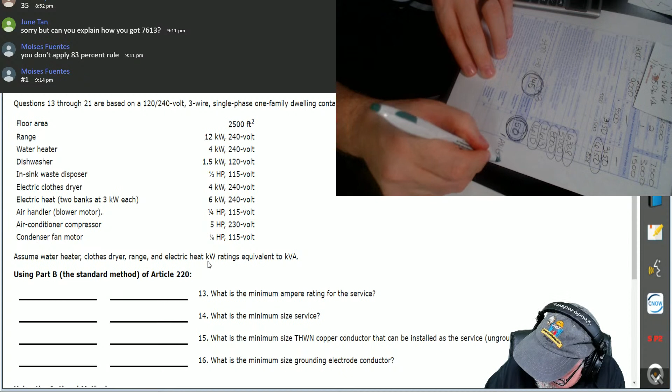All right. And then last question here, 16, it says, what's the minimum size grounding electrode conductor? Well, guess what? It didn't say it was ground rods. Here's another thing that people screw up on the exam. It didn't say ground rods. It didn't say plate. It didn't say pipe. It didn't say Ufer ground. It didn't say anything like that.

In 250.66(A), (B), and (C), if they tell you it's a ground rod, if they tell you it's a concrete encased electrode, things like that, then you can use 250.66(A), (B), and (C). If they don't tell you what type of electrode's being used, then you want to go to Table 250.66, based on the size of the ungrounded conductor. In our case, it's a 1, so we're going to go to the NEC.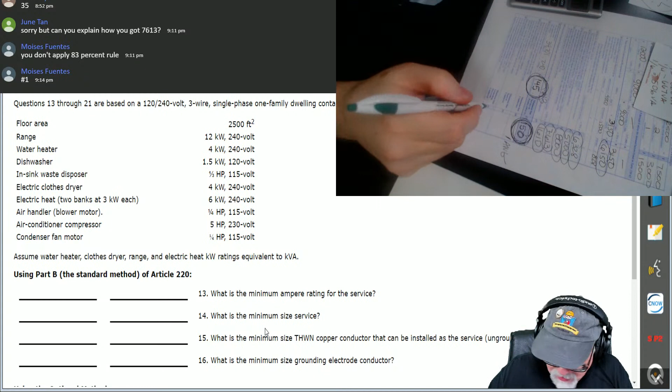So what's the minimum size grounding electrode conductor? And you're thinking to yourself, why isn't it aluminum? Remember, on an exam, always assume copper unless they state otherwise. Okay? So in this case, the answer here is 6 Cu. And that's how you solve 13, 14, 15, and 16.

And now the other ones, we don't have time tonight because again, my wife is going to kill me, are exactly the same way. You just use the optional method. It's no different. In the optional method, you simply take in all the nameplates. The beginning starts out the same, and maybe I'll save that for another episode, and we'll do that. But again, I wanted to give you the basics.

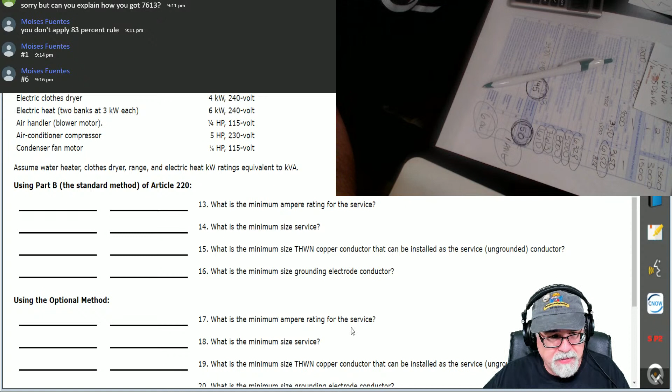So let me figure out how to turn this camera off of here. There we go. Let me get back to the main menu.

Great episode tonight, guys. We spent, what did we start at? 7? A little over 2 hours. We covered a lot. Believe it or not, Unit 8 is one of the tougher units. 11 is tough as well. 13 is tough as nails. But inside the Fast Tracks program, you learn how to do all these.

But I think what's important is that you get to use this form, it's awesome. I mean, look at it. I worked this whole one out using this. Now, some people say, yeah, but I don't get to use this on an exam. Absolutely not. Okay? But what it does is train you.

Now, June, let me go back to your question, because you asked where I got it, and I want to make sure I cover it. I want people to not think I forget them. God, I look like a bum. Anyway, I want to make sure that everybody knows where I got the values, June.

Where I got that 7,613 you were asking. Okay. So let me go back real quick to that, because I just remembered that I did not answer that for you. And I want to make sure you're clear. I want you to be successful. And to be successful, I have to be very accurate. I take a lot of pride in making sure I make things clear.

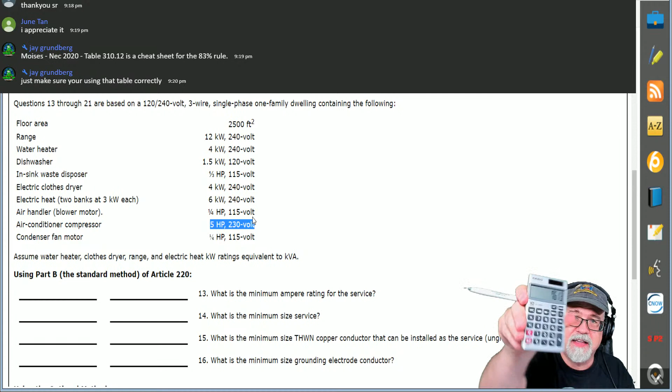So remember, the blower motor was 667, so I'm adding that back to it. And then also remember that condensing fan, that was 506 VA. Okay, so I'm adding that to it. And that's how we got the 7,613. That is larger than the 6,667 for the heat. So you take the larger. In this case, the AC wins. And that's what you put down here.

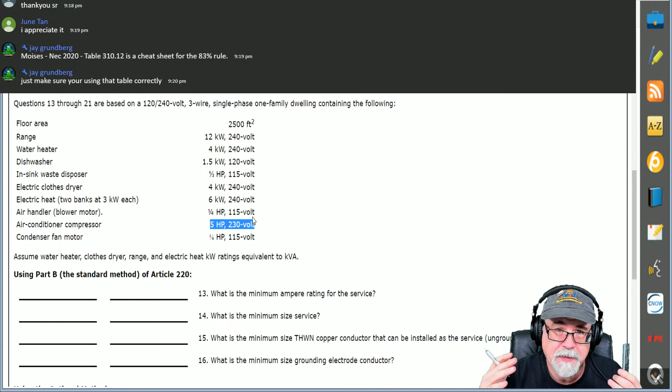And then the last one is you take the largest motor of the whole dwelling. Okay? And in this case, that air conditioning compressor was the largest motor, but I only need to capture that additional 25%. So you take that 6,440 times 25%, and that's where I got the 1,610, and that's what you write down as that extra 25%.

Okay? You're saying, where does that say that in the code? Go look at 220.50. That talks about the motors and the air conditioning unit under 440 that has to be taken at 125%. Well, you're already taking it at 100%. So the reason you're capturing that additional 25% is to meet that rule. I need that additional 25 to meet the rule that says I take it at 125%. Well, I already took it at 100%. So all I need to capture is that additional 25. And that's why we go through that. Okay? All right. But that's where we get those values there. Hopefully that helped you out. If not, go back and watch the video again.

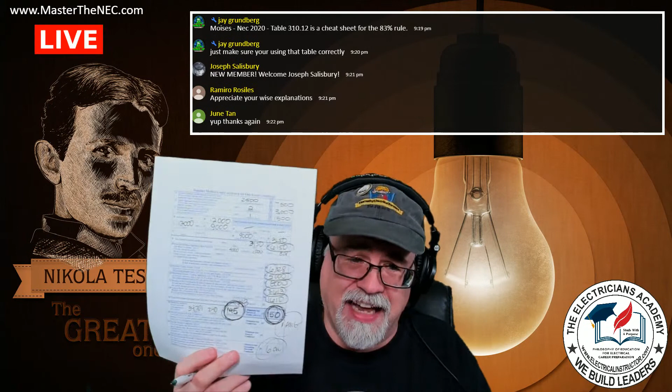All right. That's a lot of stuff. We covered a lot tonight. How much do you think you'd pay for that one-on-one tutoring? I gave you 2 hours of my time for free, because why? Because I believe in you. And I do believe in you. And you can be successful. Code is easy. Don't make it hard. Make it easy. Okay? I like to do the math. I don't like to use those little tables. I like to learn the percentages. I'm anal about it that way. Anyway, great show tonight.

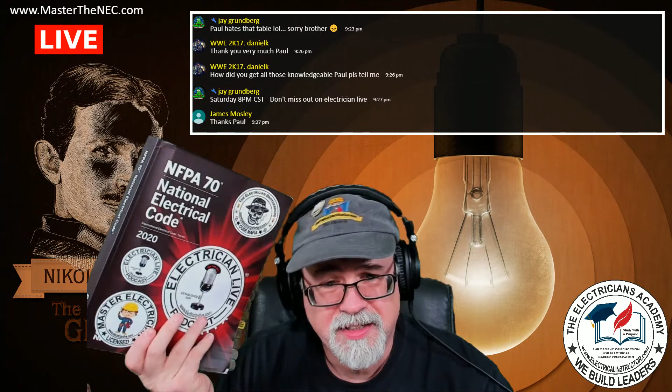How did you get all that knowledge, Paul? Please tell me. Oh, how did I get all this knowledge? Ask my wife, because she's the one that sacrificed for 30 years of me teaching code, being embedded in this code book all the time, sitting on code panels for many years. When I was 15 years old, I decided electricity was my thing, and it served me well my entire life. I'm very blessed with electricity. I'm very thankful. I like to think that I owe that gentleman an awful lot, because he inspired me when I was very young. And I enjoy it. I enjoy helping you folks too. Okay?

So, that's it. Jay said, dude, I learned this because I watched YouTube videos. Absolutely. Daggone right. I'm a YouTube junkie.